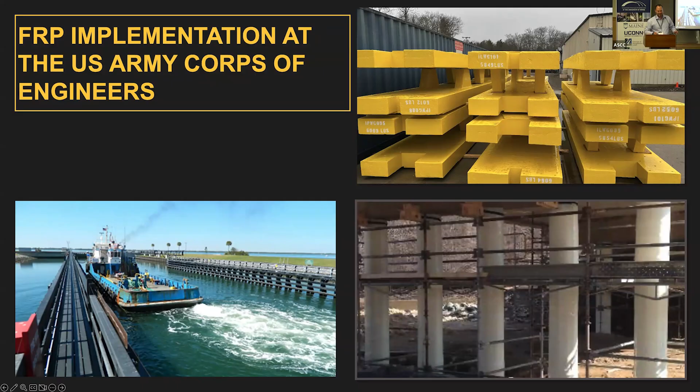So many people don't know that the Army Corps of Engineers is a major asset owner in their Civil Works program, like many DOTs are. So they have major structures that are billions of dollars. Couldn't believe some of the stuff when I saw it when I was there. But this is just a quick snapshot of a lot of the steel type structures they have controlling your navigation waterways. So the Ohio, the Mississippi, all of those real infrastructure important locations.

So locks and dams that span the Mississippi River. Those big roller gates are 120 feet long. Some of them are 40 feet tall. So we're talking millions of pounds of steel literally sitting and operating in the salt water and fresh water all over the country. So you got locks and dams. The bottom one's a sector gate. That's in Canaveral. Outside, you can watch rocket launches from there.

Flood risk management. So a lot of dams, that's hydropower, but it also keeps the water back so people's houses don't get washed away. And then these need maintenance. So they need large dewatering structures, now currently made out of steel, to put in there while they can do their 5, 10, 50-year maintenance.

Oh, that's why, I keep pushing the wrong button.

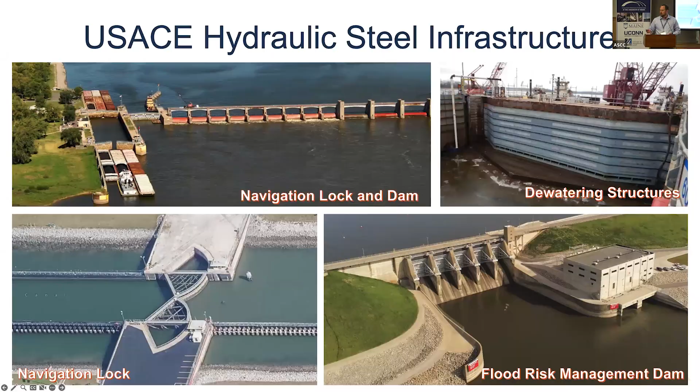So you have all of these billion-dollar structures scattered all over the country. There are thousands of locations with tens of thousands of different components. So it's kind of a snapshot.

Yeah, I was working for Army Corps Inland Navigation, no structures up here. It was fun. Had to fly everywhere.

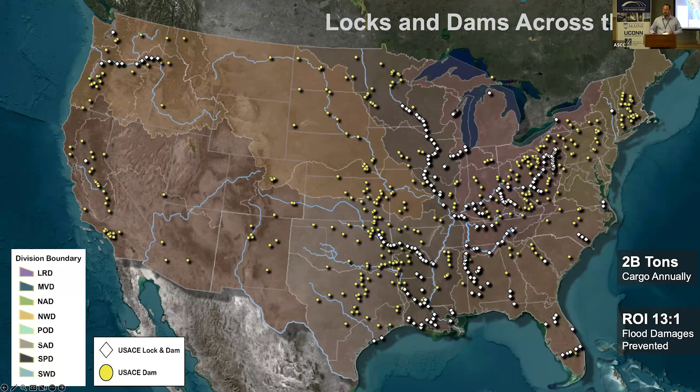So like any steel structure sitting in water, protected by coatings, aging infrastructure and corrosion, same old song, everyone's heard it every day. So forward thinking, the Army Corps looked at a problem statement, put a bunch of officers in a room, problem statement, find solution. So steel structures require reoccurring and costly maintenance. There are over 13,000 structures that were built between the 20s and the 70s, all coming to the end of their 50-year design life at that point.

So looking at a 50-year holistic chart, you need to replace 260 structures per year, minimum, in order to maintain the average, which is to the tune of $1 to $2 billion, which was never going to get funded by Congress. So the solution was another tool in the toolbox. So through research and actual projects, FRP is offering a significantly longer service life with much less maintenance required.

A lot of the cost charrettes have been showing that because of how complex USACE structures are for steel and fabrication, it's actually coming out to be similar first costs, which surprised a lot of people. Bridge girders are simple. Locks and dam structures with their lattices and all those complicated angles take very long to refabricate as a steel structure. And faster design.

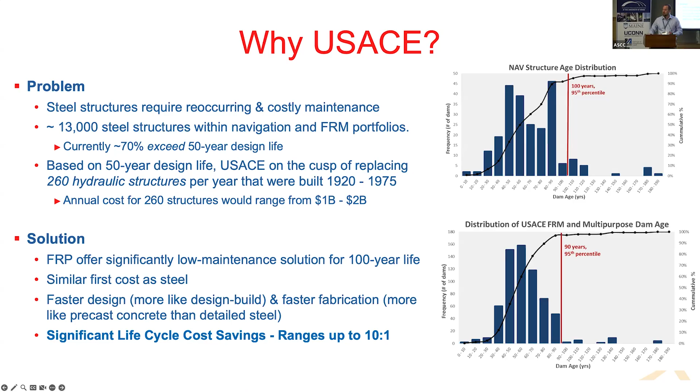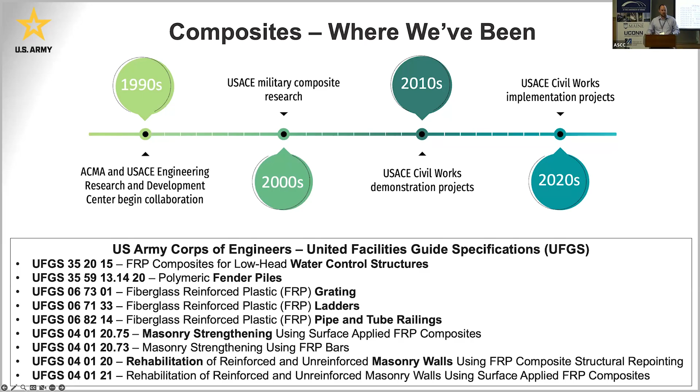So one of those things is, like anything, they've been looking at this for a while. As people have known, the US military, both Army and Navy, and Air Force, have been playing with composites for a long time, not a new thing. So they started in the 90s, military research in the early 2000s. So this is just a continuation of already adopted and proven technologies.

So with that, one of my good colleagues, I call him the godfather of the program, got a bunch of projects funded, because that's kind of the valley of death. You got research being complete, projects implemented. How do you get there? You need to have funding. So he managed to get a bunch of funding packages put in.

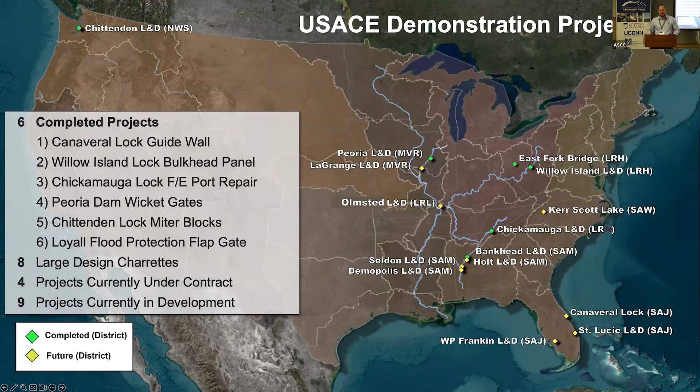He was out of the South Atlantic Division, so a lot of these are in the South. But to kind of get demonstration projects, get the Corps familiar with it, work out the kinks in the system, get our specifications, get the contractors used to doing business with the federal government, which is always an adventure.

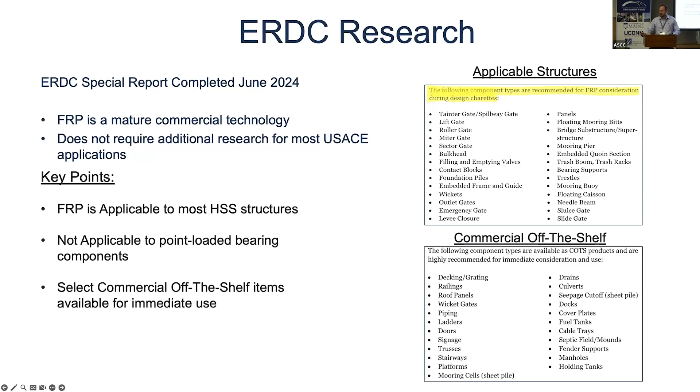Like anyone who's done FRP knows, it's not great for point loads. So you still need to have steel components in there for lifting arms and things like that. And there is a huge list of already commercially available products that can be utilized immediately.

So like anything, Maine, Army Corps, not the first to do anything. The Dutch were well ahead of everyone. So the Rijkswaterstaat has their own miter gates. Those are 40 by 60 foot leaves. There is a 20 by 40 foot vertical lift gate on their dike, holding the North Sea back from flooding them.

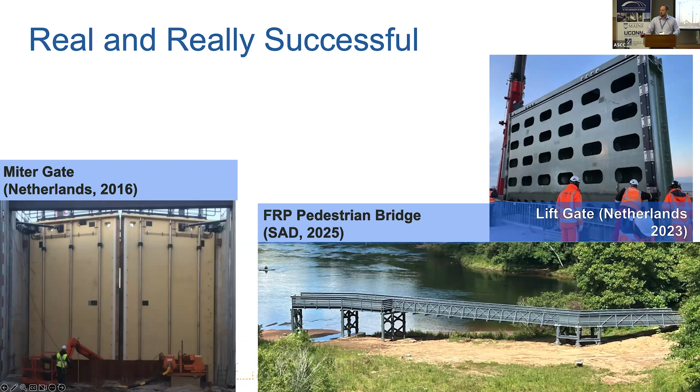And that is the in-construction pedestrian bridge that's being done on national lands, done out of the South Atlantic Division. It's the first one where the pultruded structures actually have kinks in them. So it's kind of all put together like a normal steel structure. It's not fully straight. So it's been really, really successful in other locations.

So a lot of people ask, well, how do you get the states to cooperate and get things doing it? Very similar with all the Army Corps districts, but in order to combat that, myself and a couple of others, working together with headquarters, use the purse strings. So an engineering guidance went out about July of last year, which requires all of the districts to do a 100-year life cycle analysis for any repair or replacement of existing structures. If a budget package was put in that did not have this done, it was kicked back.

And yes, some districts tried to do it. I got a lot of last-minute phone calls saying, help, we need to do this because our budget package got rejected. And their goal is to transition where appropriate and cost-effective. So we're not going to be putting an FRP on a 100-foot high head where if it goes, it's going to kill millions of people. It's a targeted approach using engineering judgment. And like anything, updating the guidance with the state of the science. As we learn more, we'll update things.

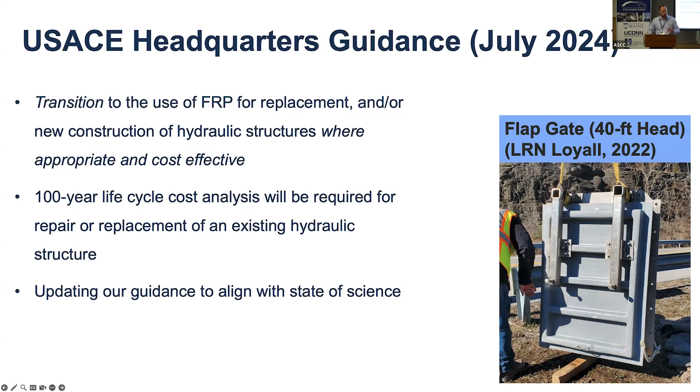So just kind of an overview of opportunities on a standard structure that could replace this, not just the huge big ticket items. So a normal lock, 1,200 foot long, 110 foot wide, 40 to 60 foot deep, massive structures.

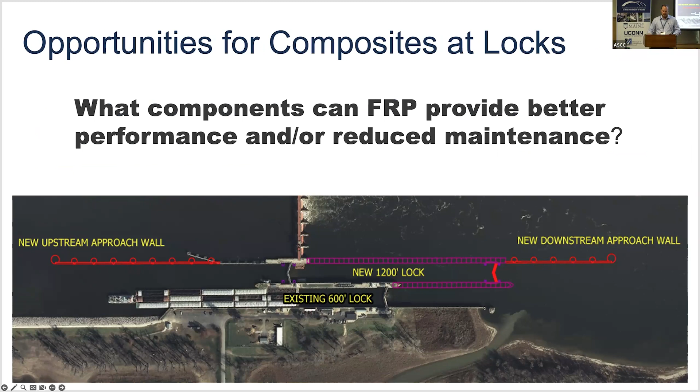So everything in yellow, we kind of identified as this is steel. Why can't it be replaced as FRP? You notice everything on there, I'm sure you can see the slides bigger, that's not concrete, says it can be pretty much FRP, and including the reinforcement of the concrete. I'm a firm believer of why are we putting black steel in the ocean. Been doing composite stuff for a while. It always bothered me.

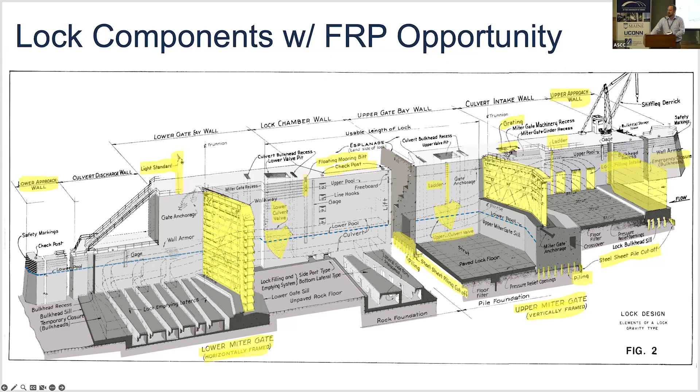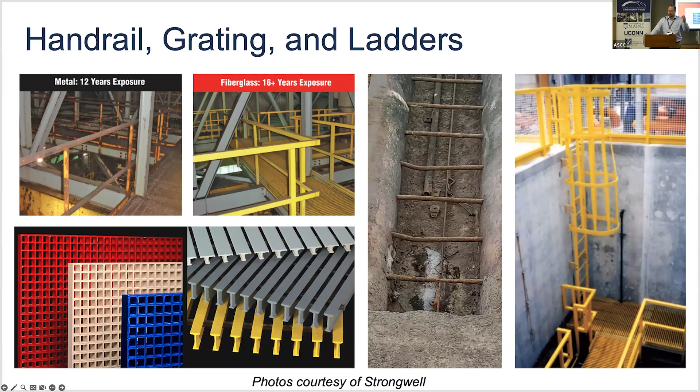So just kind of jumping through some of these smaller stuff. Handrails and gratings. There's 20, 30 commercially available structures that you can do that. So why aren't they, with all their steel stuff and catwalks on these structures, why don't they do FRP instead of going galvanized steel?

Trash racks, bulkheads, and floating mooring bitts. So trash racks are the gates that prevent debris from going into the filling valves because it's opening and closing. It's a huge system of gravity to raise and lower locks. Valve bulkhead, so flat plates with girders in them, pretty straightforward. And then floating mooring bitts.

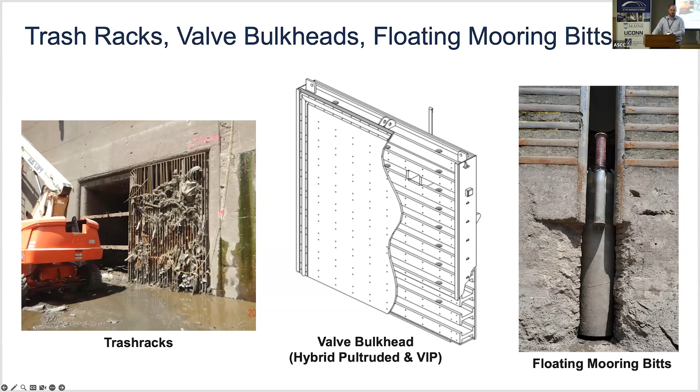So these floating mooring bitts are what barges tie off onto in the lock, and they float up and down to keep barges in place. They're a welded pipe. What happens when a welded pipe gets a hole in it? It sinks. So instead of having floating mooring bitts that aren't being useful, why not use an FRP tube filled with foam? Will never sink.

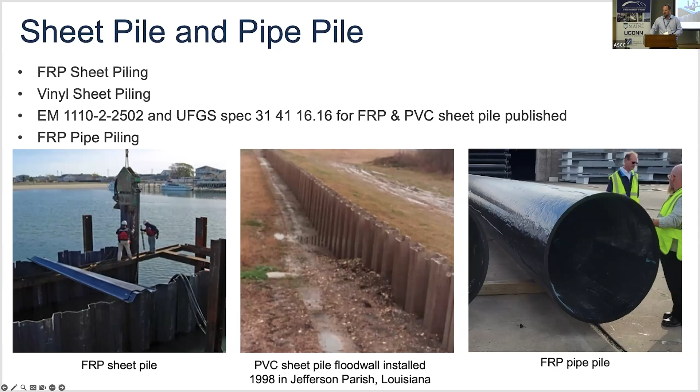And of course, there's sheet pile and pipe piles. It's everywhere. MaineDOT has been doing it. That's a 4.5-foot pipe pile going to a marine project for a turning dolphin. That's out of Composite Advantage in Dayton, Ohio. And of course, PVC sheet pile walls, Army Corps project in the late 90s in Louisiana. So been around forever, commercially available off the shelf.

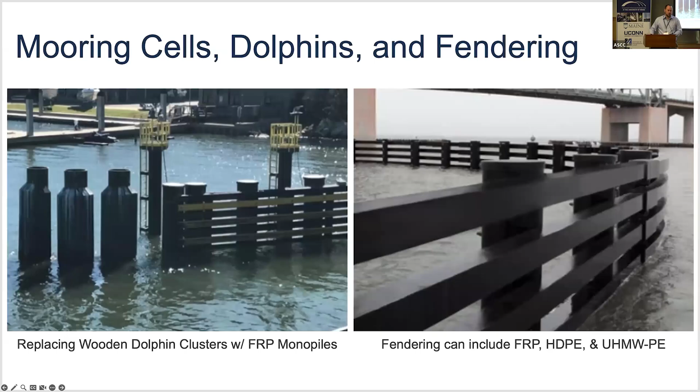And then mooring dolphins and cells. I don't know what it is, but the Corps has a deep love of using timber. Timber breaks. Steel, when they use steel, provides a distinct shock. These mooring dolphins actually can take, deflect, and return back, so any impacts don't damage the boats or sink barges. That's a huge problem with steel armoring, piercing a barge and them sinking in the navigable waterway.

This is actually the only solution to a current project where they have to prevent invasive Asian carp coming up the Mississippi into the Great Lakes. Illinois and the Army Corps are working on it, and they have to use electronic deterrents, I guess. So they need to have a rebar that is electronically transparent. So GFRP is the only solution for that. So kind of interesting things.

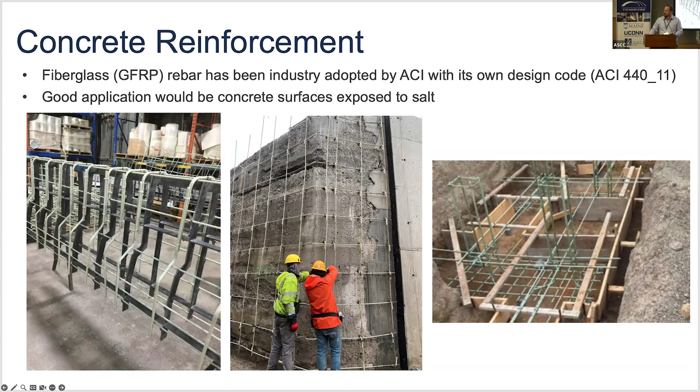So the meat and potatoes, these are the currently funded, in-progress FRP projects. This is current as of last week. Everything in blue is fiscal year 25, which means this will be out, advertised, in theory awarded by 30 September. The Canaveral Lock sector gate you see there is currently out for advertisement, and I believe it closes in 2 weeks. So that's a 55-foot radius, 25 feet tall. We need 2 of them.

So big, huge structures. Lock 16 Tainter valve has been awarded, waiting on construction. Don't know if it's going to be done at Kenway in Augusta or if it's going to be done at Composite Advantage's facility in Ohio. Completed those wicket gates, all fabricated here in Maine and shipped to Ohio. They've done it at Kenway. That's how I got involved with the Corps.

Miter blocks done by Orenco out in the Seattle area. So this is a very high lift miter gate that they used out there. A miter gate's like an arching bridge, highly complicated. And like I said, there's a huge $20 million worth of projects awarded to date, and probably another $55 million, $60 million in the pipeline for 26, 27.

So, and it's all over the country. So they're actually following through and doing what they do. Had my hand in most of these things as they were going on, and a lot of good stuff out there.

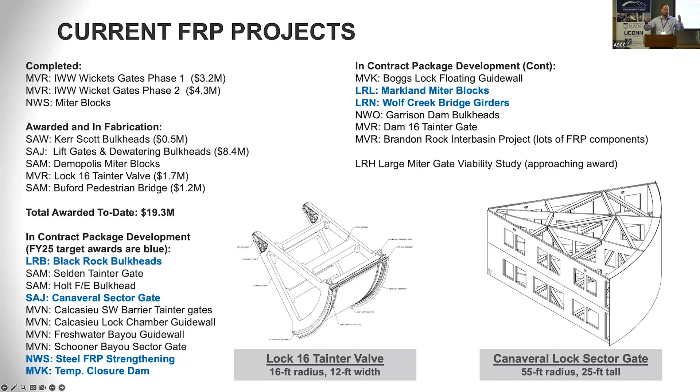Boggs floating guide wall, that was a concrete box that they used to tie off ships to. Concrete got a crack in it, it sank to the bottom of the river. So looking at utilizing other applications for FRP that USACE is doing. Modifying actually one of those Navy camels that's built in like 5 container ships of FRP. So why can't we use that kind of concept for a floating barge?

They're looking at it for replacing their floating plants. There are steel structures that are being worked on sitting in the water all the time. Army Corps has a huge naval fleet of their ships that they own. So this was another solution that they were looking at through their Marine Design Center.

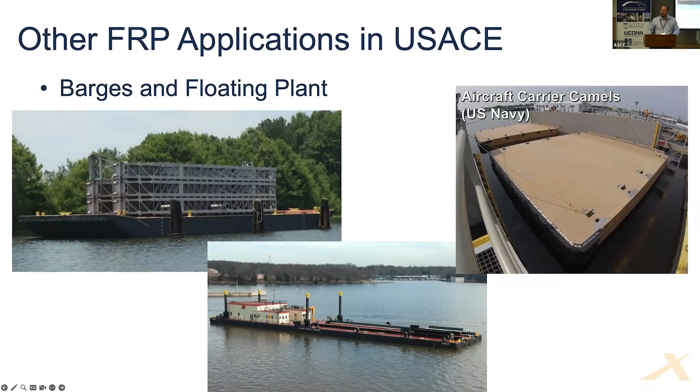And some other cool things that have happened last year while I was there that I was involved with is using externally bonded carbon fiber to strengthen heavily corroded or damaged steel structures. So this Tainter gate is in a highly corrosive river, so it's pretty well eaten up.

So ERDC, in combination with the district and a couple of others, and myself came up with a solution to use externally bonded to add more tension to the tension flange to keep it in service until it could be replaced. Funding cycles, 2 to 3 years out, and another 2 to 3 years to get something. So this one, about 5-year lead time from when they knew that it needed to be replaced to when they had funding and it being fabricated.

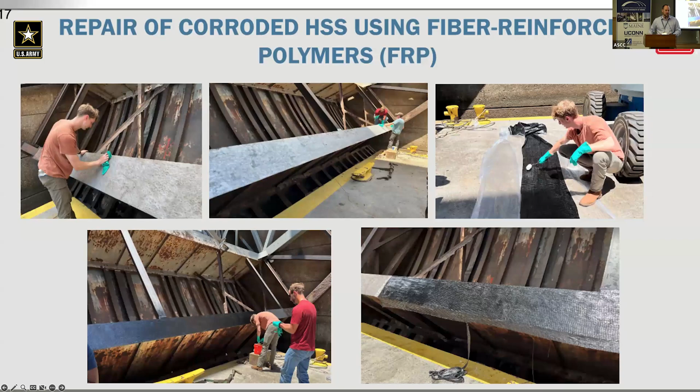And this is one of those emergency save the day. So this is in Lockport, in the Chicago district. During a routine dewatering, they noticed the casting of the pintle, which is where a 150,000 pound steel gate sits on and rotates. So that is an operationally critical location. Lead time to getting a machined casting, 6 months, a year, 2 years at best.

So utilizing what we learned in some finite element modeling analysis, we applied an externally bonded FRP system using 2 layers of carbon fiber as kind of a maintenance fix to put that back into service. It's being monitored, it's still in great shape, and I believe that casting it'll be closed down and dewatered shortly after the new year. So, but operationally important. There's hundreds of millions of dollars worth of goods going through this waterway. It'd be like shutting down 95 and not allowing anyone on it.

So breeze through this. I know I got put up against the wall in trying to stay on schedule.